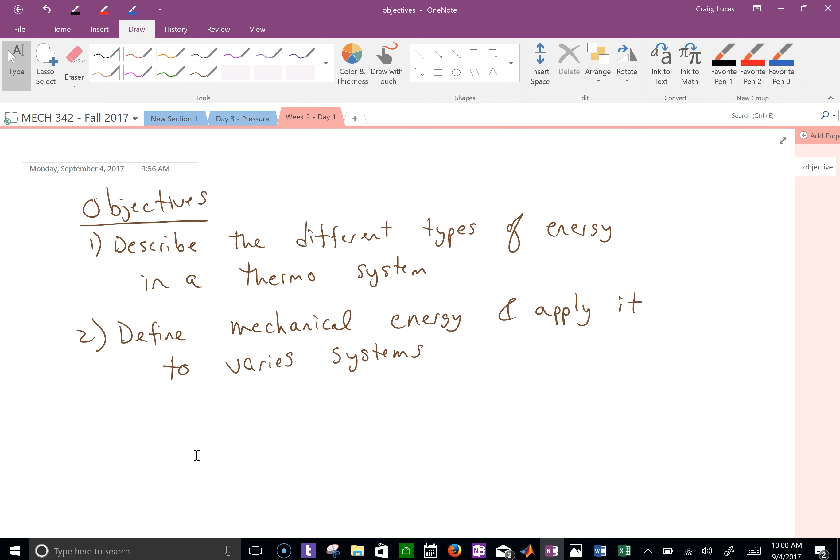Okay, so the plan of attack today is I'll do a quick review of last class, and then hopefully answer the question about pressure. And then we'll describe the different types of energy, and then define mechanical energy.

Power. Are we doing that today? No, we're not doing that today. We will. Yeah. For the objectives?

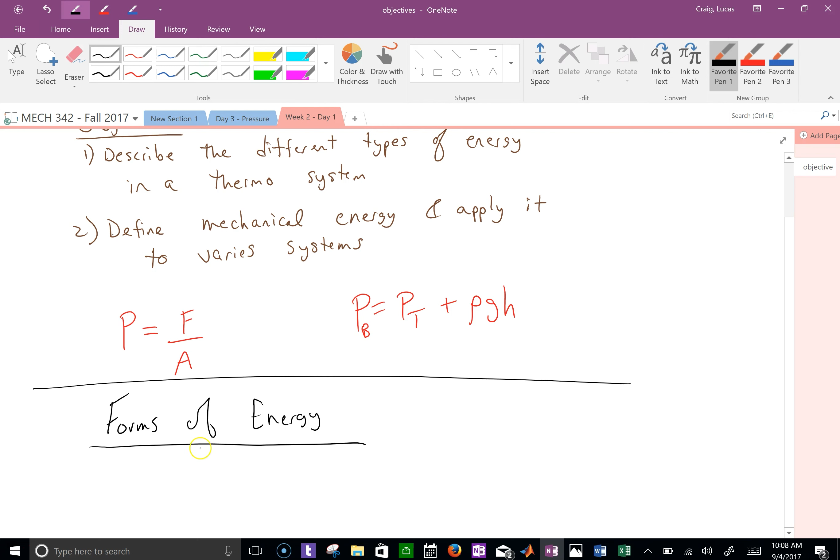Yep. Okay, so forms of energy. You already know them, but it's good to review. Kinetic energy. So what's the kinetic energy equation? Did you get those, Ben? Yep. Okay. Yeah, 1/2 mv squared. And m is your mass, and v is your velocity.

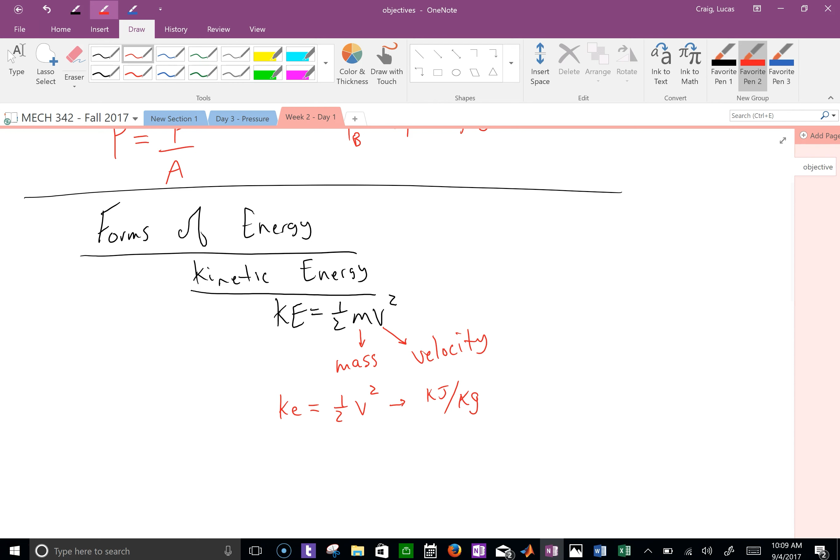Now, you will see this a lot. Little ke, what do you think that is? Specific kinetic energy. And actually, this equation is 1/2 v squared. Because what's the unit now? Could be joules or kilojoules per kilogram. Yep. You will see that.

Okay, potential. I think we're going to cover, my guess, when is it going to be? Friday will be the first law. Basic fundamentals of the first law.

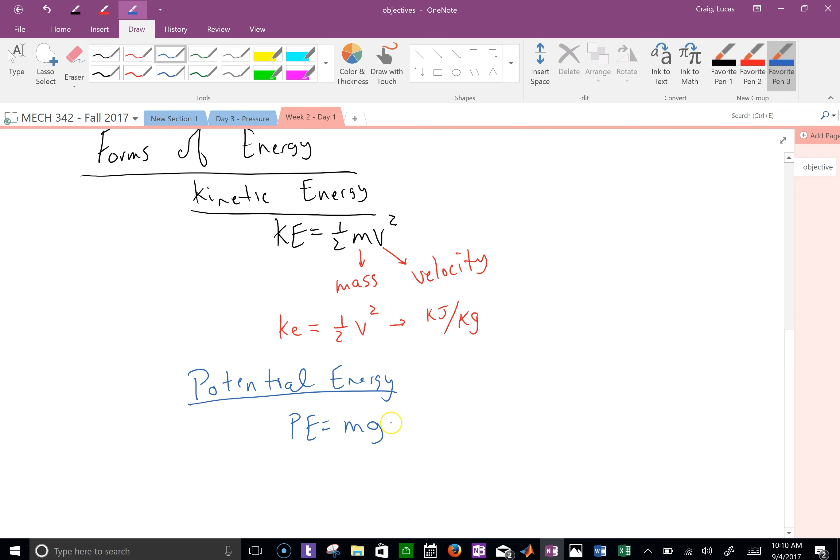So potential energy, remember that equation? mgh or z, doesn't matter, yep. This is your mass, g is your acceleration due to gravity, and this is elevation. Anytime you do potential energy, you should have a datum. Right? What is a datum? The reference point. If you're above your datum, your potential energy is positive. If you're below your datum, potential energy is negative.

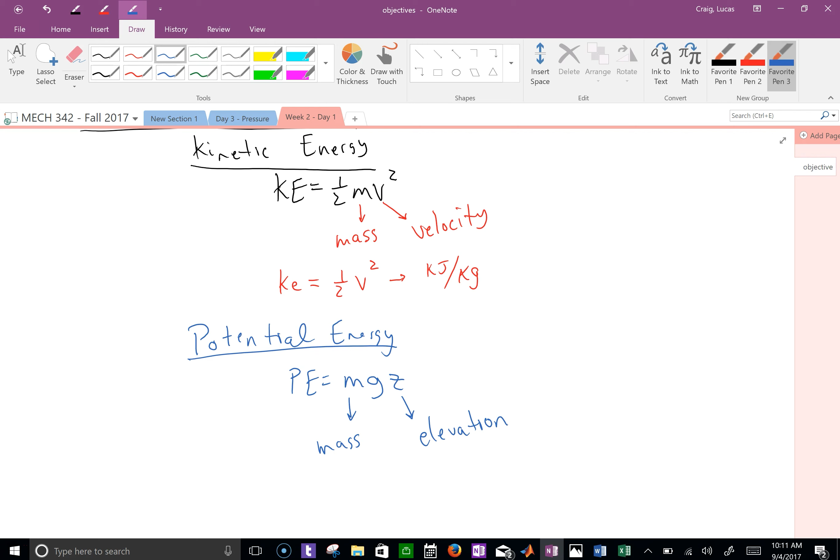What's that? It is just dependent on if the system is doing the work. We'll talk about that next week. Okay, you'll see negative and positive and what the difference is, because there's equations that I want to show you that do that. Okay. What about little pe? What's that? Yep. So it'd be just gz.

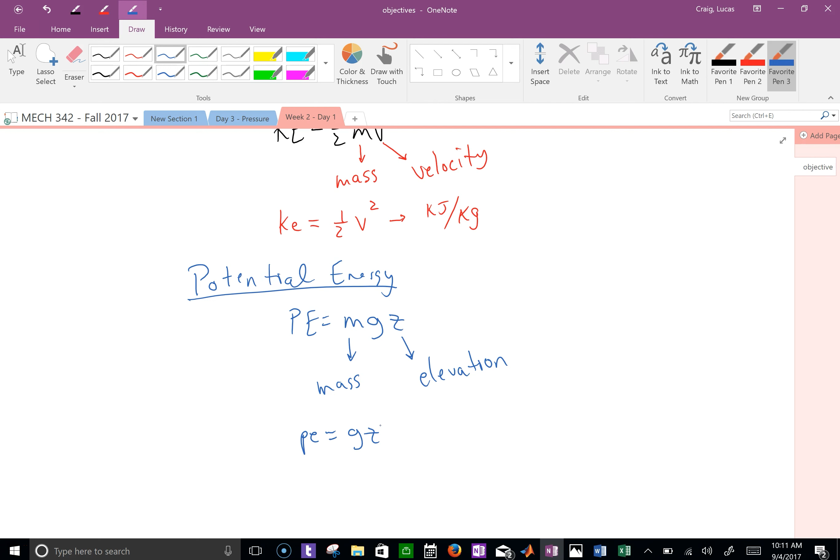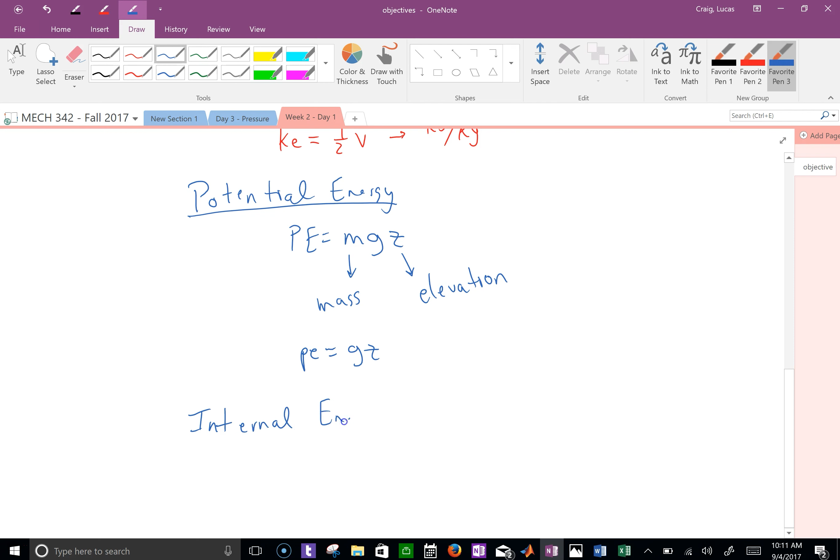Okay, the last one, actually there is one more, but we won't cover that till probably Wednesday. Oh no, we will cover that. Okay. We have internal energy. Yep. Internal energy. There's no real equation for this until we get later on in the semester, but you'll see internal energy as big U or little u.

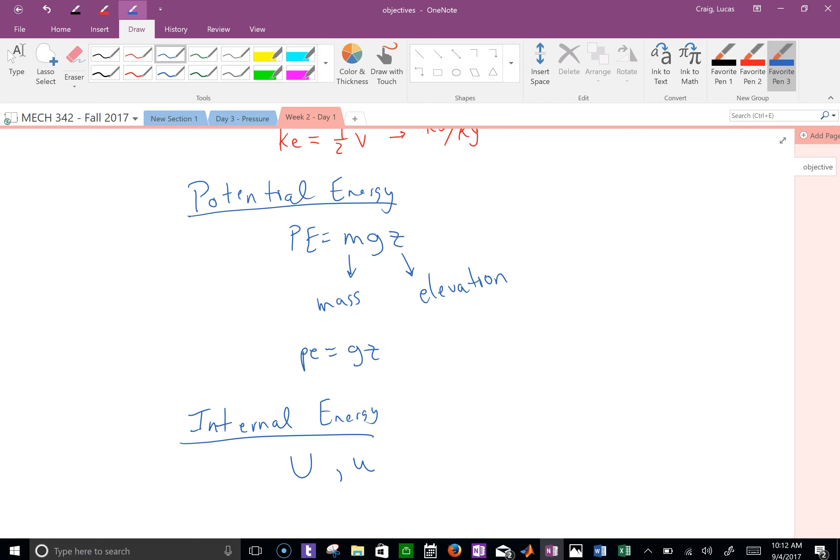And all internal energy is, it's just dependent on temperature. So if the fluid or the gas or whatever's at a certain temperature, it has a certain internal energy. Okay, and you can kind of think about it as how fast the molecules are moving. It has so much energy. Okay. Total energy, you just add them up.

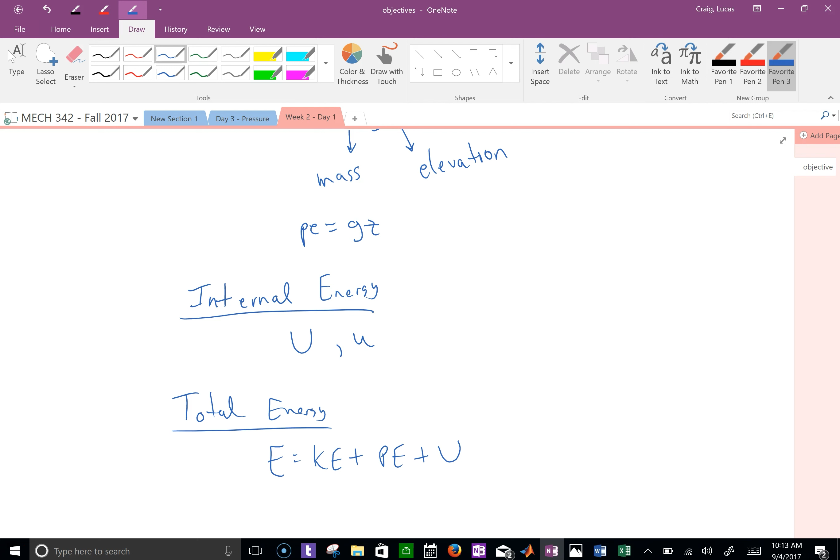And there's other energies like magnetic, electrical, and chemical, but we're not going to include those right now. You may also see the change in energy. So that's just the change of kinetic, potential and internal from two different points. Questions so far?

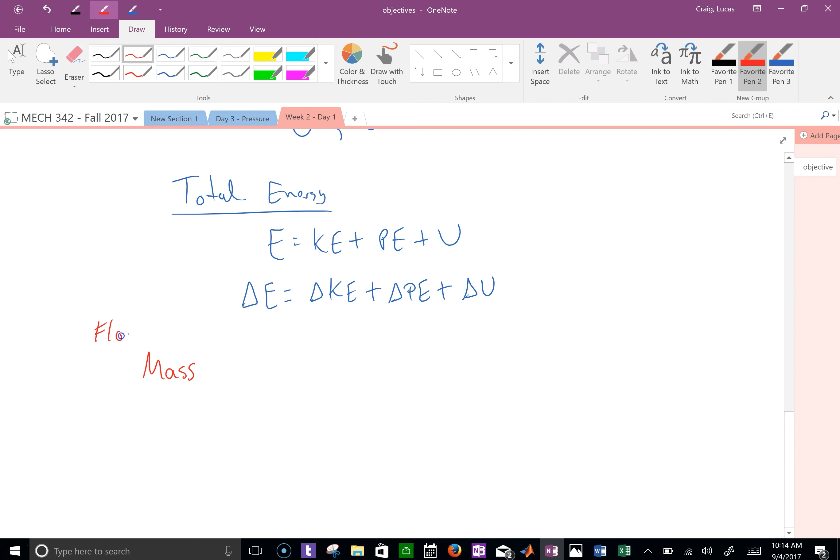All right, some other information that we need to remember or define if you haven't taken this. So let's look at flow definitions. So mass flow rate. What's the basic definition of mass flow rate? It's m dot, meaning it's kilograms per second. So in differential form, that's the change in mass over the change in time.

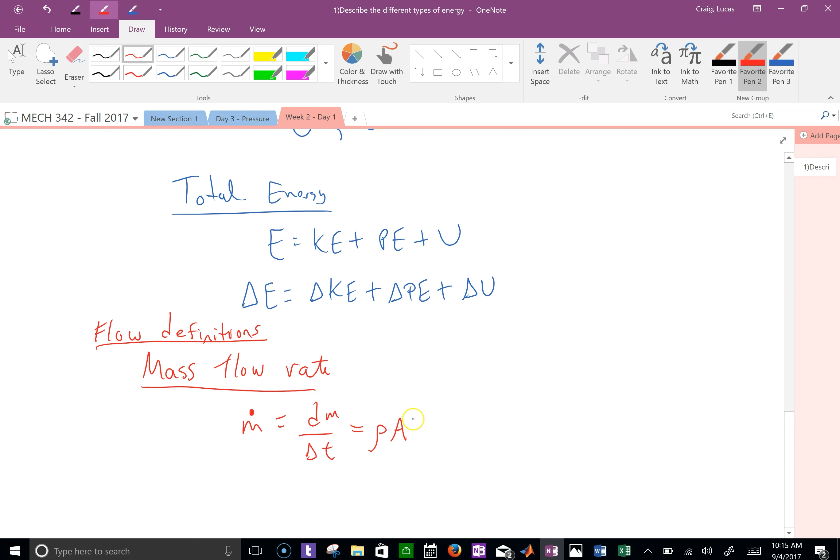Anybody remember the other equation we can use if we know the velocity and the area? Rho A V. Yep. So the density of the fluid times the cross-sectional area times the velocity will give you mass flow rate. Why? Well, check the units. Kilograms per meter cubed times meters squared times meters per second. What does that give you? Holy smokes. Kilograms per second. That's cool, huh? So rho is the fluid density, A is your cross-sectional area, and V is your velocity.

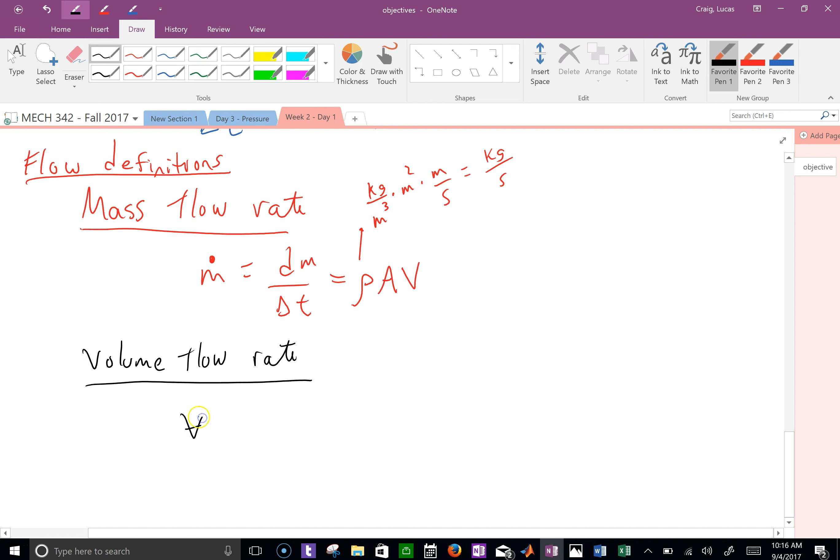How about volume flow rate? Oh, didn't mean to do that. Volume flow rate is your cross-sectional area times your velocity. So how can we rewrite m dot? Yep. Rho times volume flow rate. So just as a side note, sometimes it's written like that.

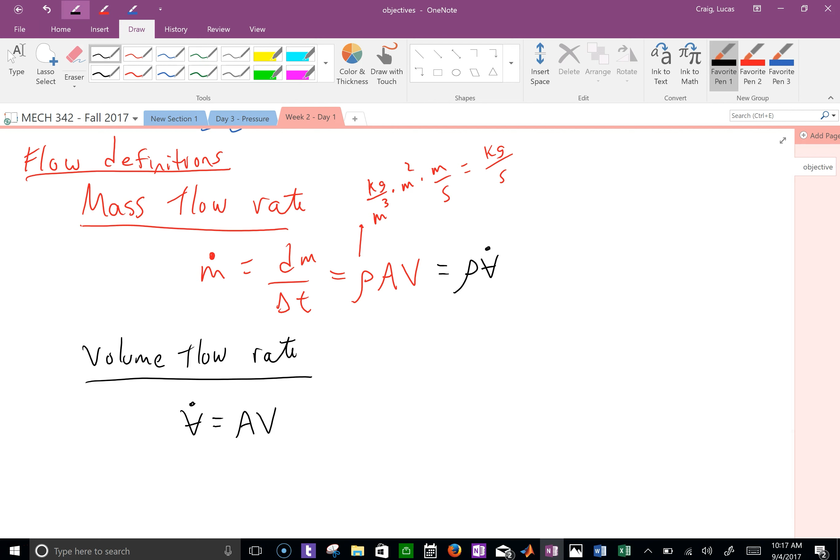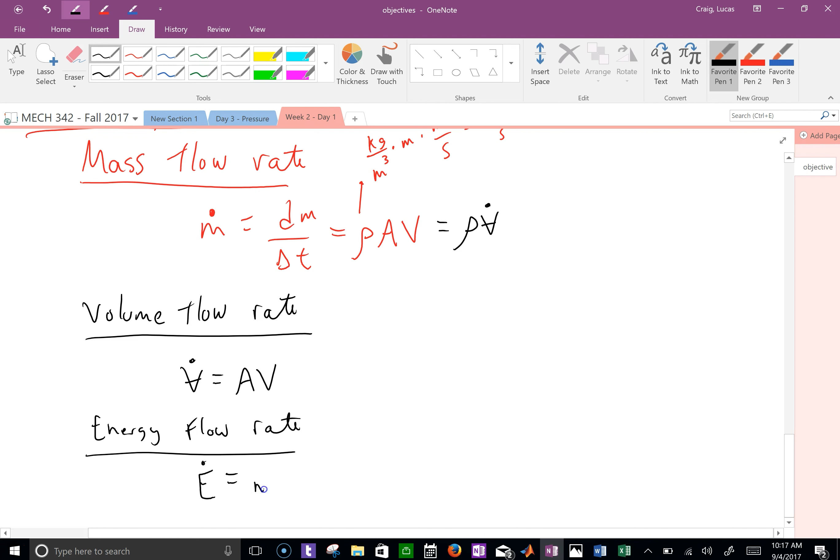You could also have energy flow rate. Anybody want to guess what that symbol is? E dot, and then it's m dot times little e. What's the unit of little e? It's just specific energy, right? Kilojoules per kilogram. Because what's the unit of m dot? Kilograms per second. So you have a joule per second. Okay, so let's talk about mechanical energy.

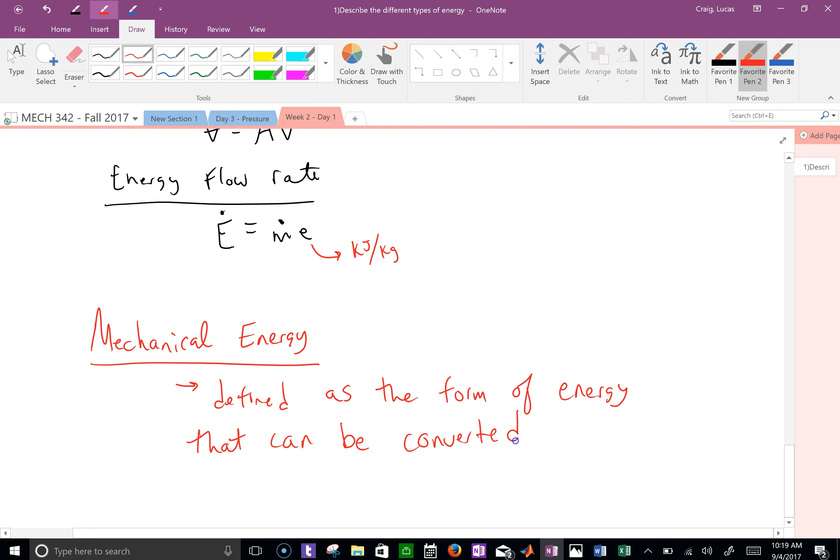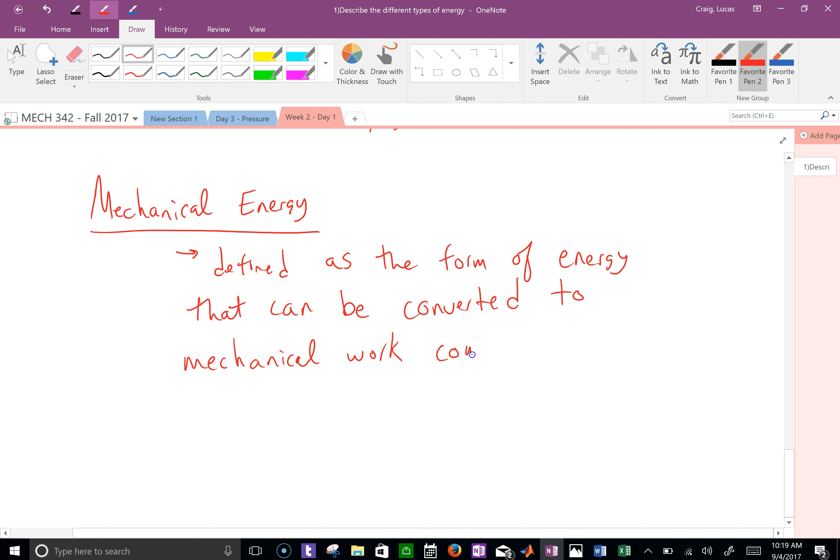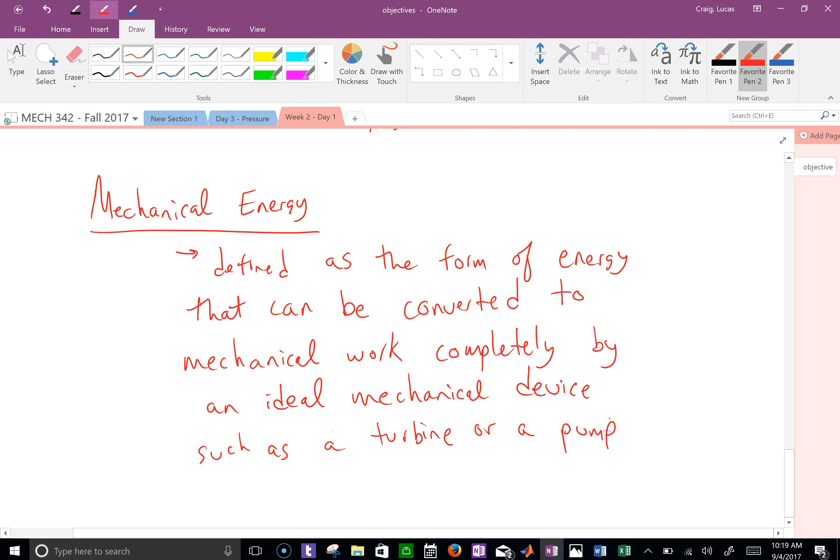So mechanical energy over here, defined as the form of energy that can be converted to mechanical work completely by an ideal mechanical device. So this is really, make sure you put this up here, it's a fluid energy.

The students that have taken fluids, think of Bernoulli's, all right? I know, but, wait, what did I say? Oh, so taking fluids, thank you, okay. I had that completely different in my head, apparently. Bernoulli's equation is really this, okay? So mechanical energy is really energy of the fluid, okay?

So if you take your gas pump, go to the gas station and you fill up. When you hit the button, it takes the energy from that tank and moves that fluid to your gas tank. Okay, so you're looking at basically a liquid or a gas. Most of the time, it's easier to look at a liquid, like water, like a pump. So we're going to look at the energy of that liquid or of that gas. So it's basically saying that there's no heat transfer in mechanical energy. We neglect heat. We just look at the mechanical part.

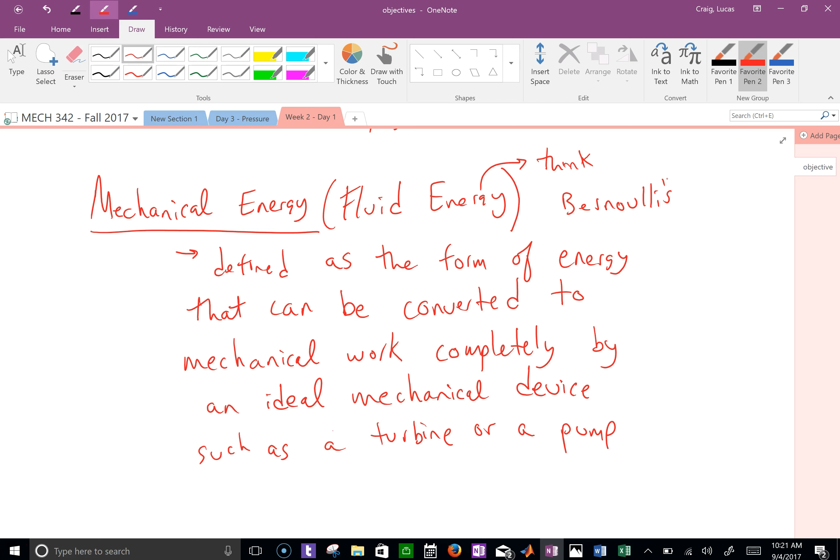Okay, so we're going to do an example, and I'm going to show you a little bit more on this. Most of the time we look at turbines or pumps for this. Yep, that's a turbine. All right, so one thing before I show you this setup here is for fluid energy, we have to include what they call flow work.

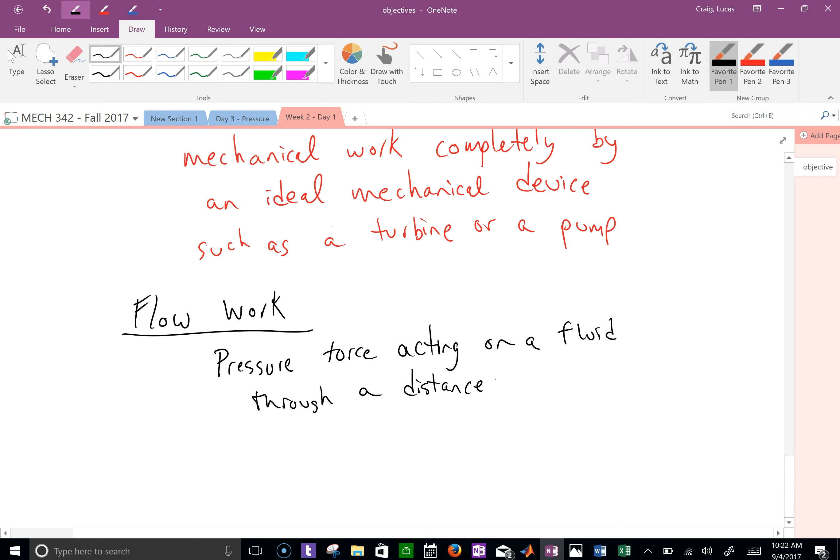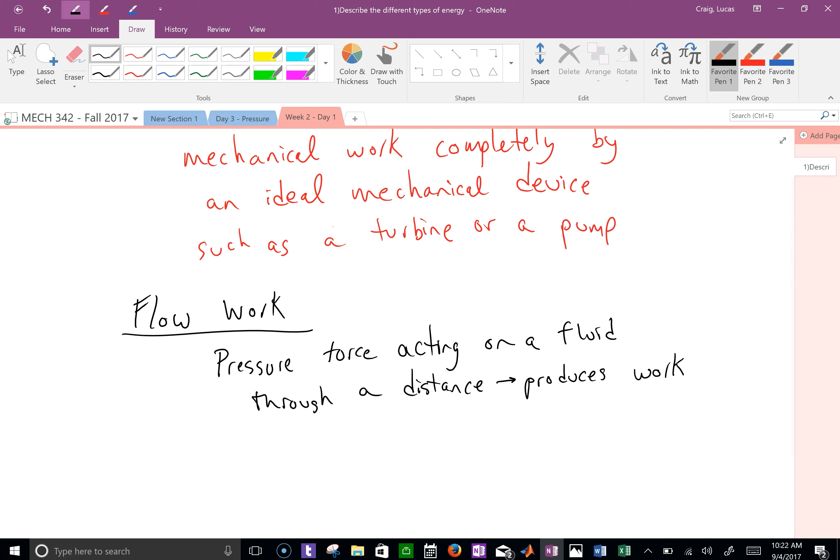And there's no symbol used for it. They just call it flow work. Yes, right here. Yep, and that's specific volume. Yep.

So again, mechanical energy is only looking at the energy of the fluid. So that's the biggest thing to remember. So let's take an air compressor. We pump it up. It's got a high pressure inside, right? And it's sealed. That has energy. That's what this is. It has like some sort of pressure energy. When we open the valve, all that pressure is basically being applied and pushing that out. Okay? So that's converted to kinetic. Does that make sense? That pressure energy is then converted to kinetic.

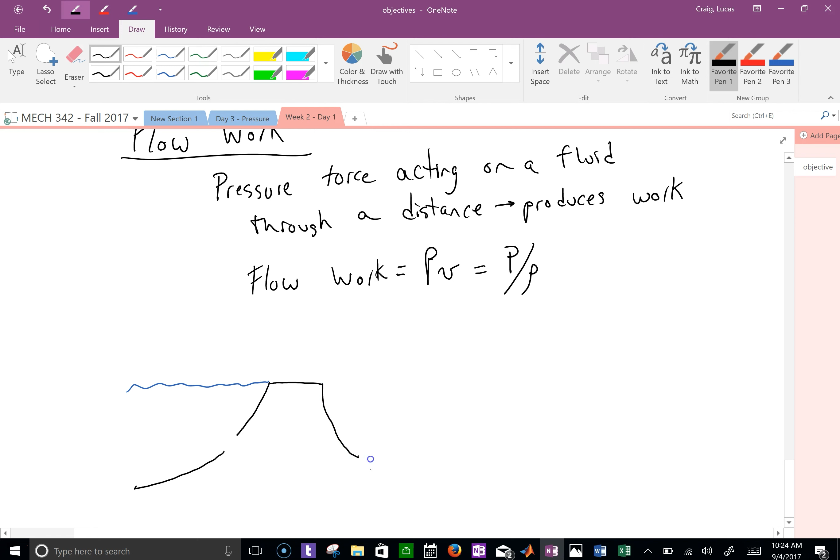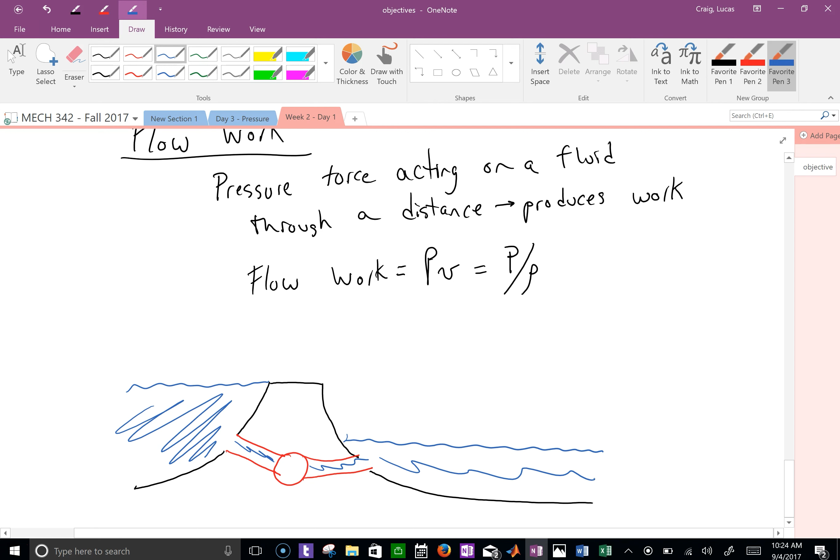Now, in the example I'm going to show you, if we have water like a dam and it falls down, you have pressure and you have all this other stuff, okay? So let's look at this, and I think this is very similar to the practice problem I'll do. That's P over rho. P over rho, yep. So here is, let's look at this. It's like a dam, and there's like a turbine right here, and the water's flowing through it.

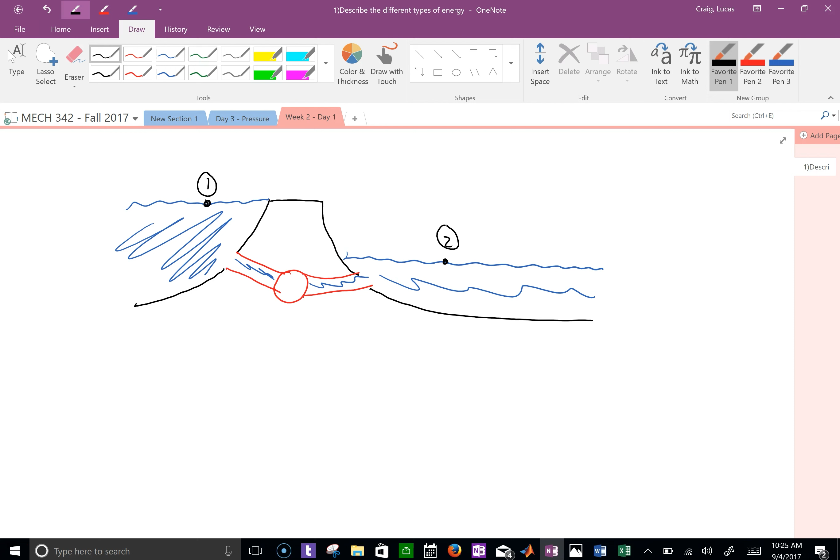So we're going to pick 2 points. Liquid, water, has energy, right? So it has this mechanical energy. We're going to neglect heat, so it's mechanical energy. And I picked two states, one on the top left and one on the top right. Could I pick my point 2? Could I pick point 2 like right here or right here?

I mean, you can. It's fine. Sure. Right? Because we're looking at energy. It doesn't matter. Energy is conserved no matter where you are, okay? In a direction of flow. At state 1 and 2, what can we assume about the level of the water and the velocity? In this case, if it was stagnant and it's just pretty high, these velocities could be 0. Right? But if we pick point 2 here, does that have a velocity? Yeah. Okay, that's fine. Doesn't matter.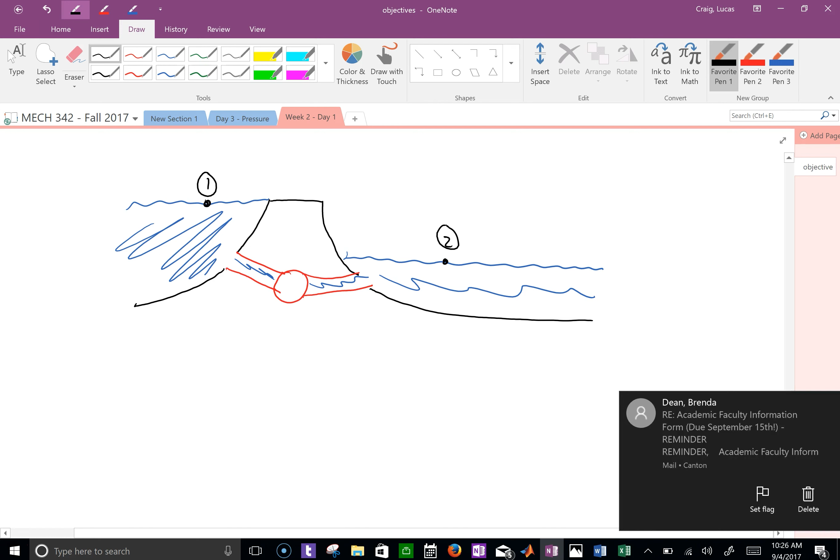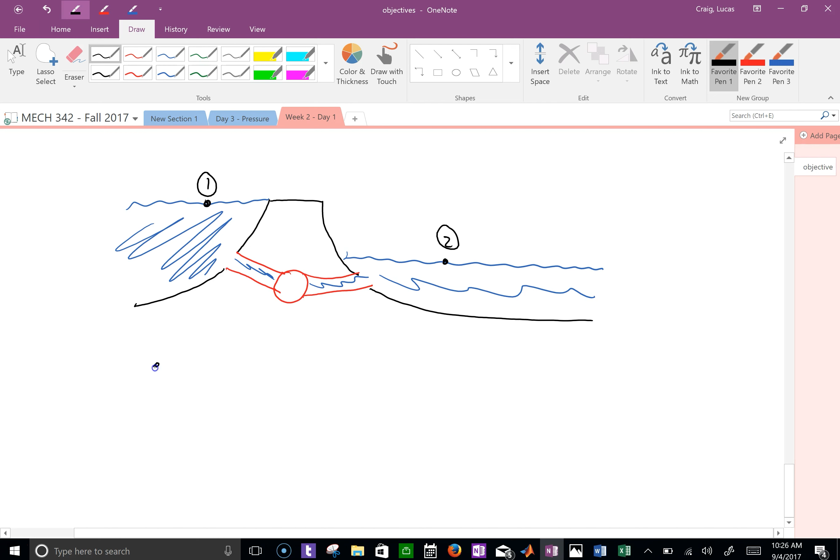Okay, what about the pressures? What is the surface touching? Atmospheric. So they're both atmospheric, right? Yep. But what's the main difference? Elevation. So it has potential. But let's write the general form for all this, which will help you in the homework in this next practice problem. At state 1, it could have kinetic, potential, and flow work.

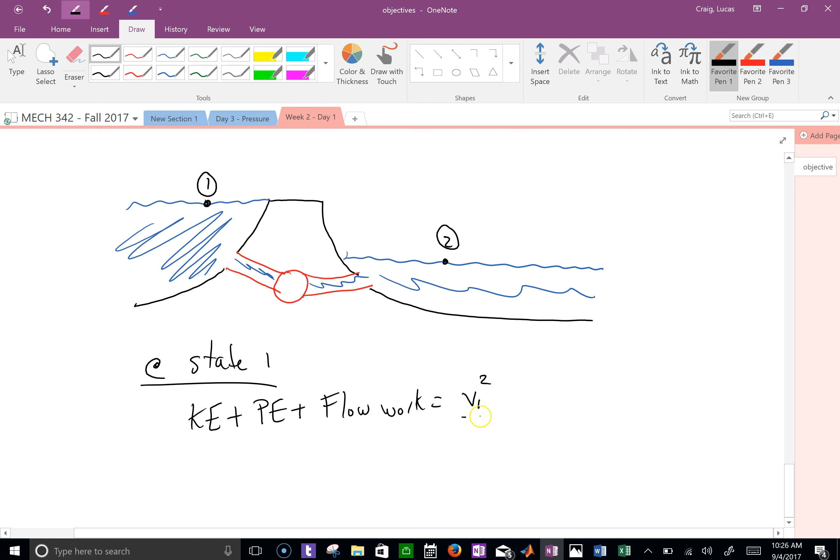So let's put them in units of per kilogram. So V1 squared over 2, plus gZ1 plus P1 over rho. At state 2, it could have kinetic, could have potential, it could have flow work. V2 squared over 2 plus gZ2 plus P2 over rho.

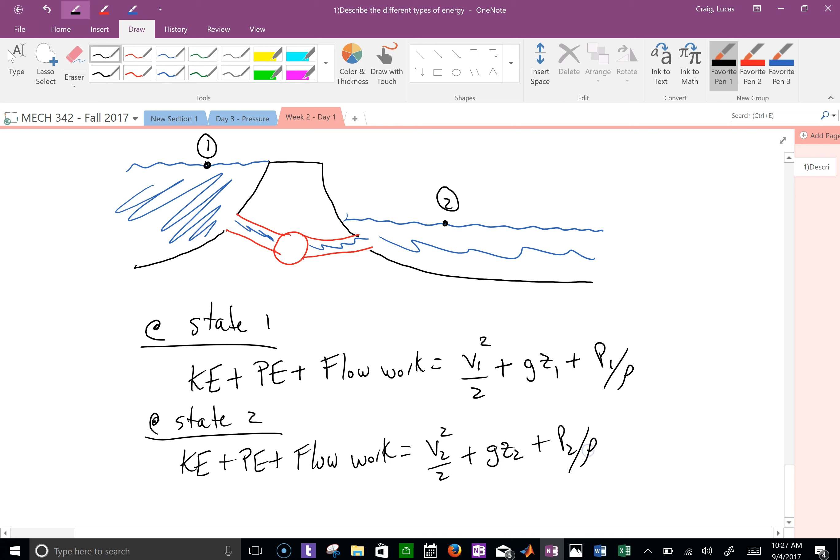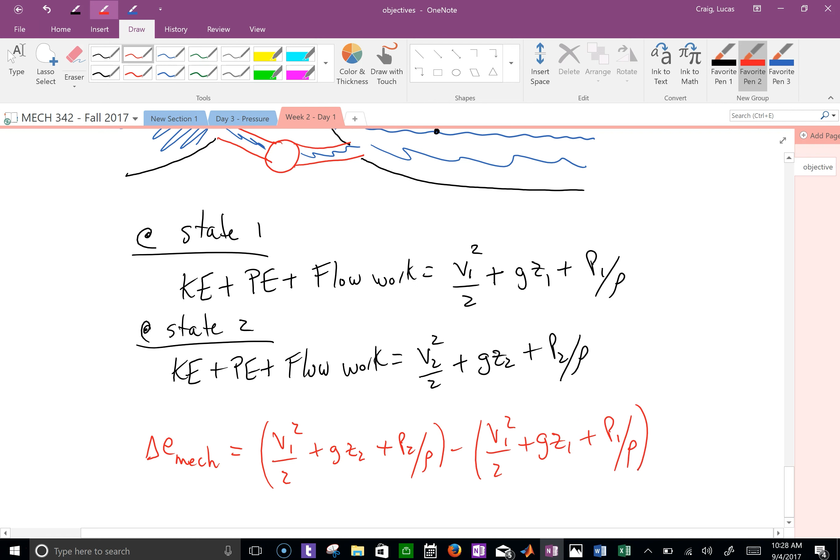Now we're looking at the change in mechanical energy, so what do we do to find that? Just take state 2 and subtract state 1. So let me write this fully out. And the reason I'm doing this is because this is what I want you to start doing on your homework. Write the whole equations out that you have, and then cancel everything.

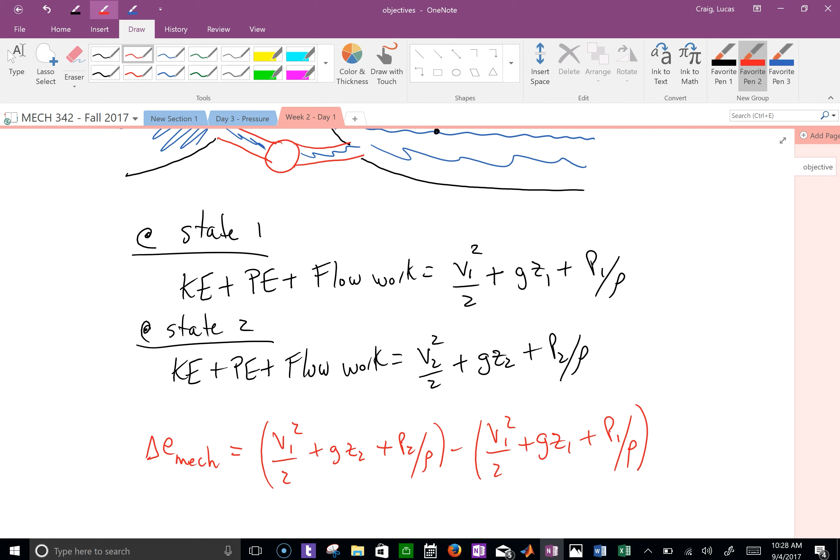Yes. Oh, did I switch that? I'm sorry. This should be V2 at the beginning here. Yep. Is that what you meant? Yes. Sorry. Thank you. Is that what you were talking about, Ben? Yep. Sorry, I didn't catch that.

So in order to find the power, which is the change in mechanical energy per unit of time, which we also define as W dot, it's just your mass flow rate times your change in mechanical energy. So basically here we had a dam, and we picked 2 points. There's no velocity at either point. The pressures are the same, so you just have gravitational. So if we know the mass flow rate going through that turbine, then the maximum power we could possibly get is the change in potential times your mass flow rate.

That's what this practice problem I'm going to do is. I had it printed out and I forgot to grab it, but that's fine. I'll let you write it down. It's not too long. Questions so far? Make sense? So it's really Bernoulli's, it's just fluid energy. So let's do this practice problem.

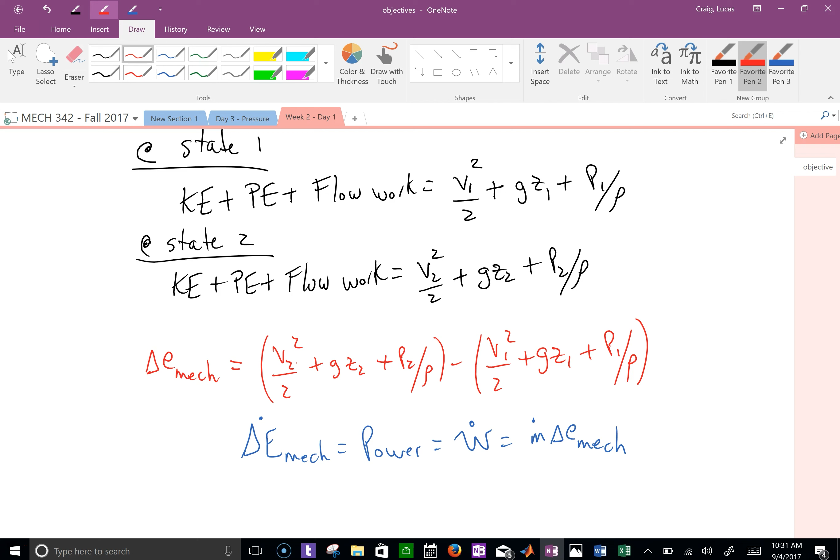A river flowing steadily at a rate of 175 meters cubed per second is considered for hydroelectric power generation. It is determined that a dam can be built to collect water and release it from an elevation difference of 80 meters to generate power. Determine how much power can be generated from this river water after the dam is filled. While you're doing that, I'll just set up the problem.

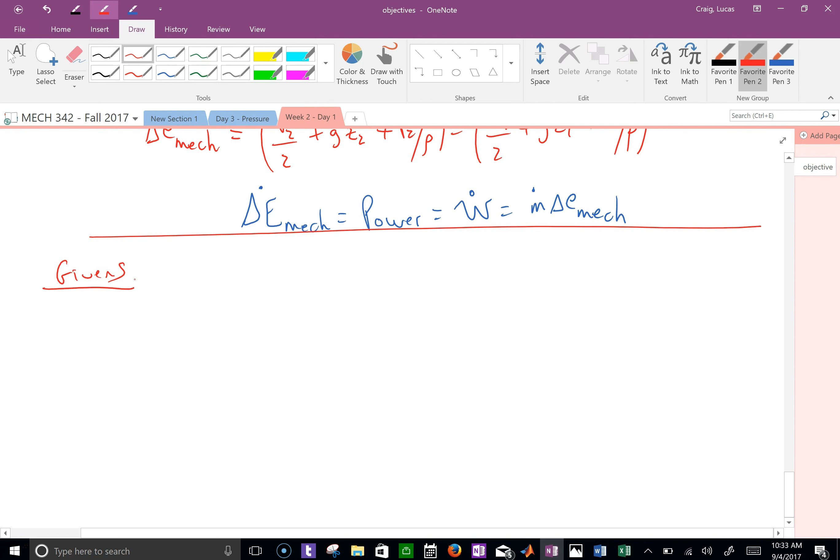What's the density of water? 1, what's the unit? 1 gram per cc, or it's 1,000 kilograms per meter cubed. So remember that. So these are generic, general questions. We'll be more specific, but basically it's looking for the maximum power that can actually be generated if it fell, was it 80 meters?

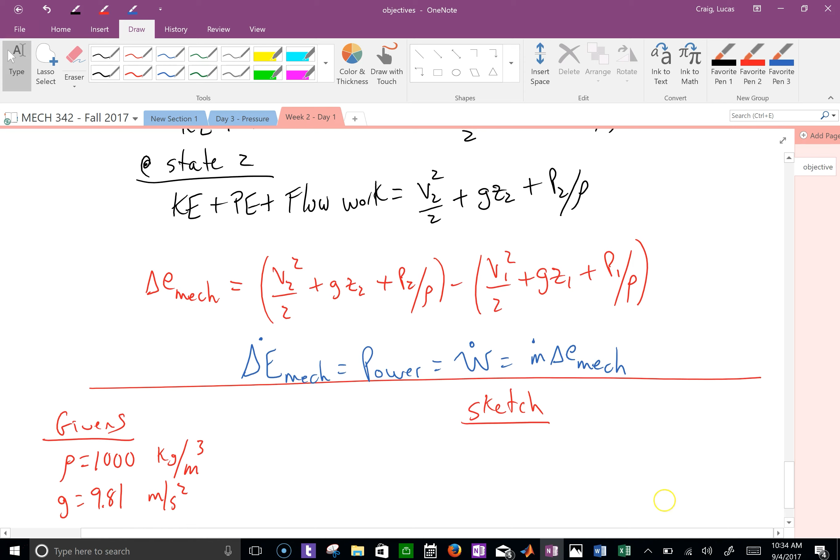So the sketch is very similar to what we had. So I'll just kind of draw it real quick. I know you can't see it yet.

Okay, let's see how this, everyone have this? Can I go back to the, so you would start doing this in the problem, right? Your givens through your sketch, okay? So go ahead and write that down, then I'm gonna just tweak a few things.

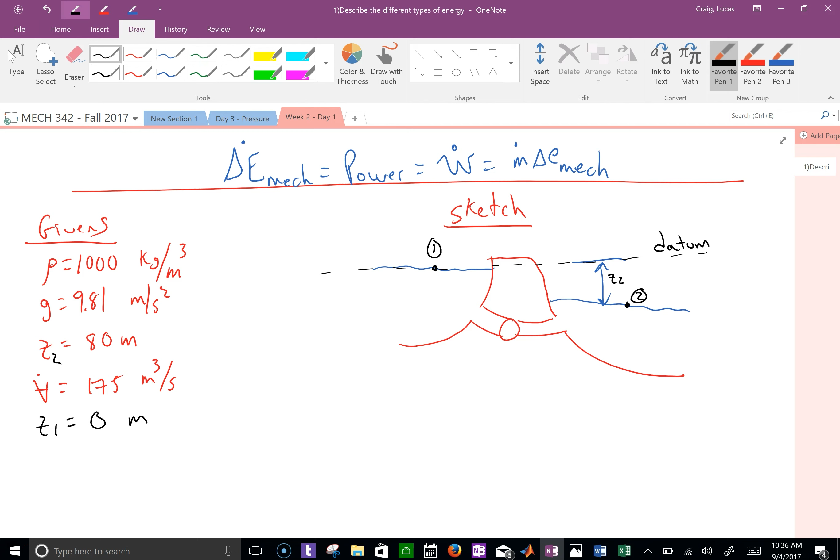And let's pick our points here and here. And I'm going to try it. Hopefully it works. So what I tweaked was I labeled Z2 down. So this distance you can call Z2, 80 meters, where my datum was at 1. And we're trying to find the power.

So as you're finishing writing this, what do you think the assumptions are that we could use? Yeah. Yes, you could do that in the givens, sure. Yep. I was going to talk about that when we get to the solution, but that's fine. Yep, because it's down, it's below the datum. So before we do the assumptions, let's talk about that.

So what happens to that energy as it falls through? It converts to kinetic, but our point 2 is over to the side, so we're not assuming velocity. But when you drop something, the potential energy decreases, right? Which becomes negative. Where if I raise this block up in altitude, it's above a datum, that means I'm gaining energy, okay? So that's the difference between a positive and negative.

So let's go back to the assumptions. First assumption would be that water is incompressible. That's always the case right now. And the other one is we're neglecting any heat between these systems, any heat that's being generated to raise the temperature or anything. So that's why it's like a mechanical energy. We're only looking at that part.

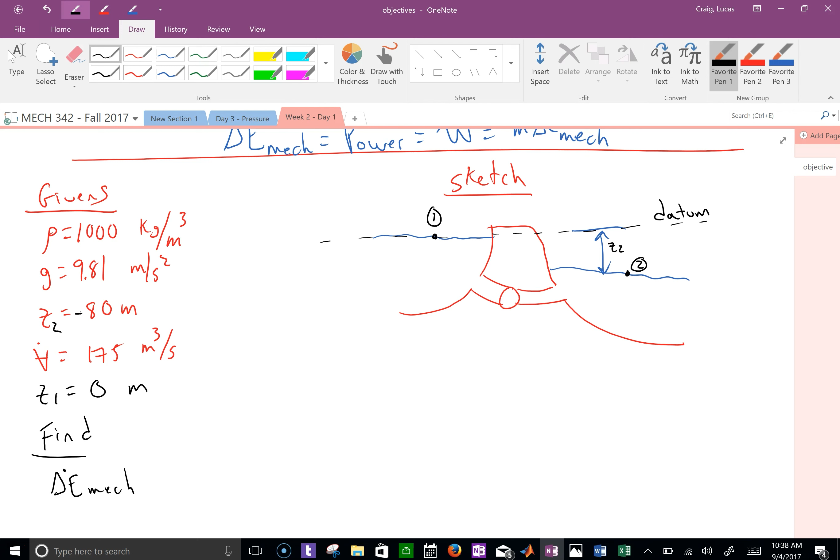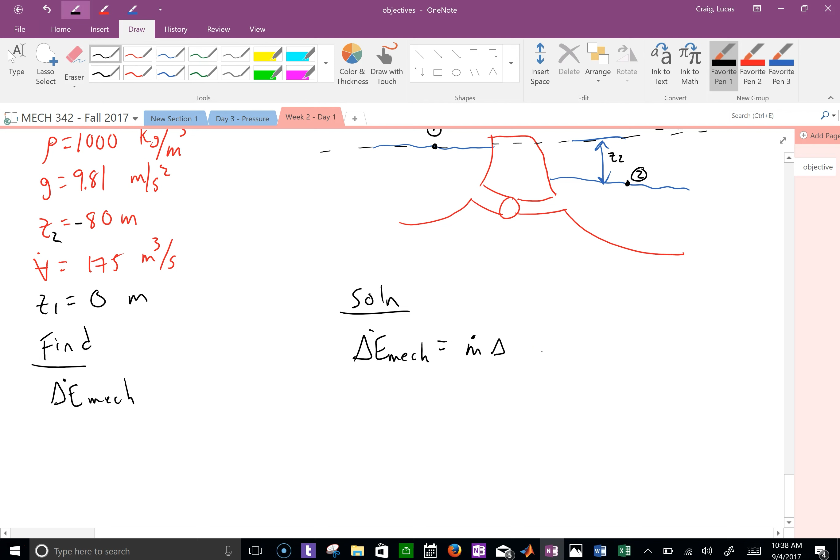Okay, so let's get to the solution. I'll do it right here, just to save some space. So we know that the change in mechanical is m dot times little change in mechanical, right? Is that what we had? I hope so. Yes. So I should have a heading. So find power.

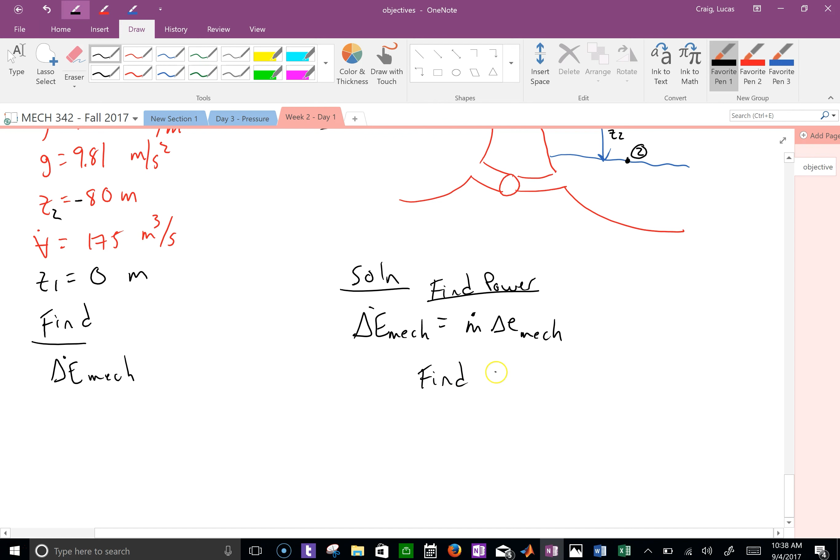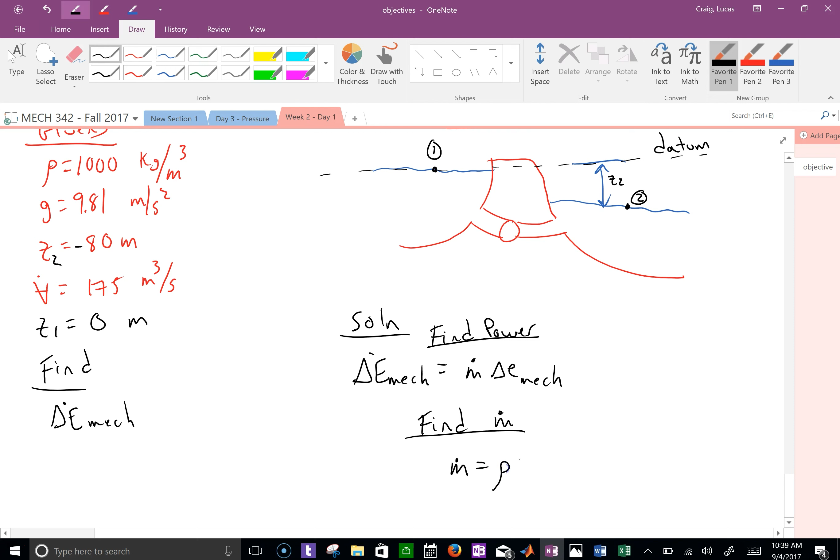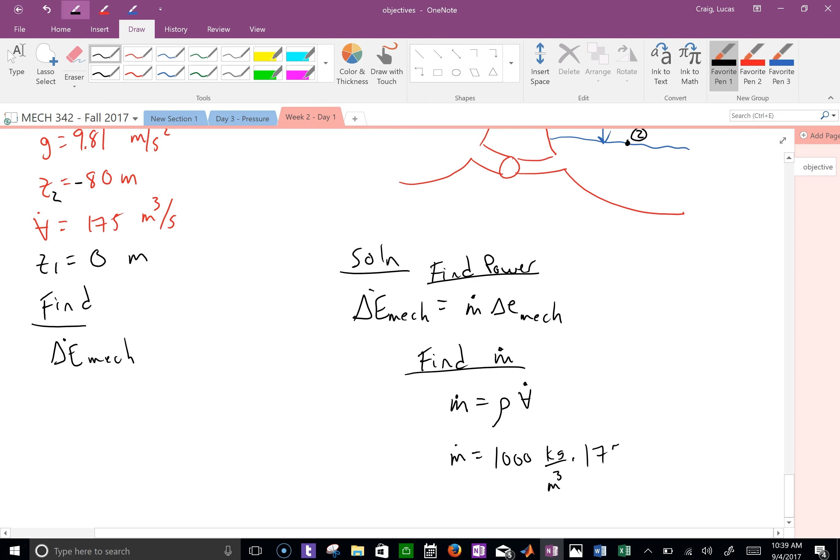So let's find the mass flow rate. What's given in the problem? Density and volumetric flow rate, right? So how do we find mass flow rate? Yep. So m dot equals 1,000 kilograms per meter cubed times 175 meters cubed per second. This is 175,000 kilograms per second.

All right, let's find change in mechanical. And we have that. So let's write that fully out. That was V2 squared over 2 plus GZ2. And then just make sure I have it right. This is the pressure. Let me fix that.

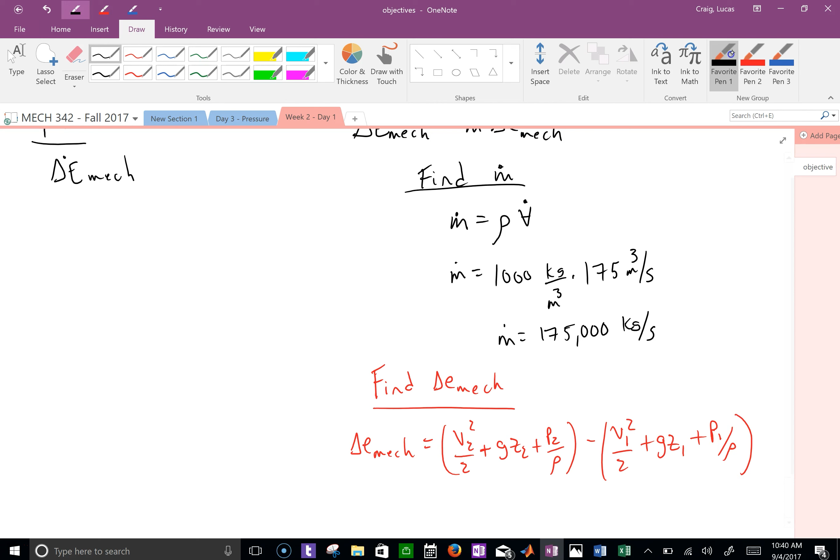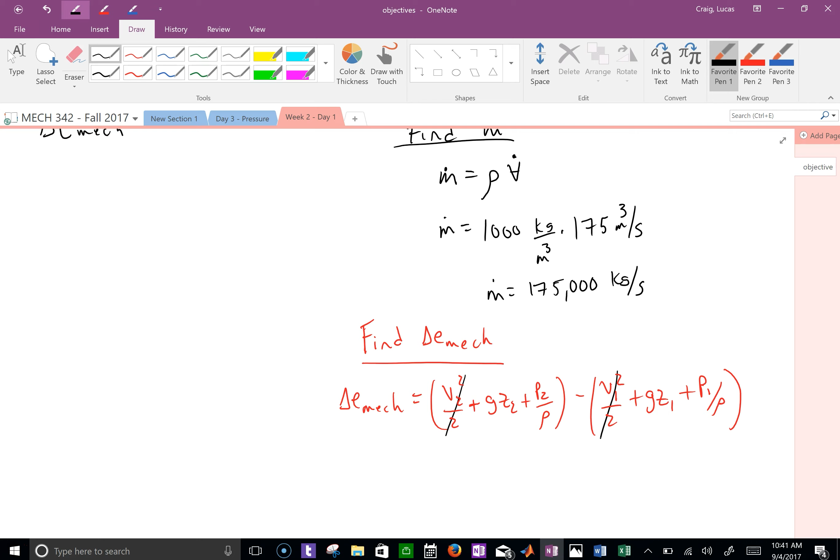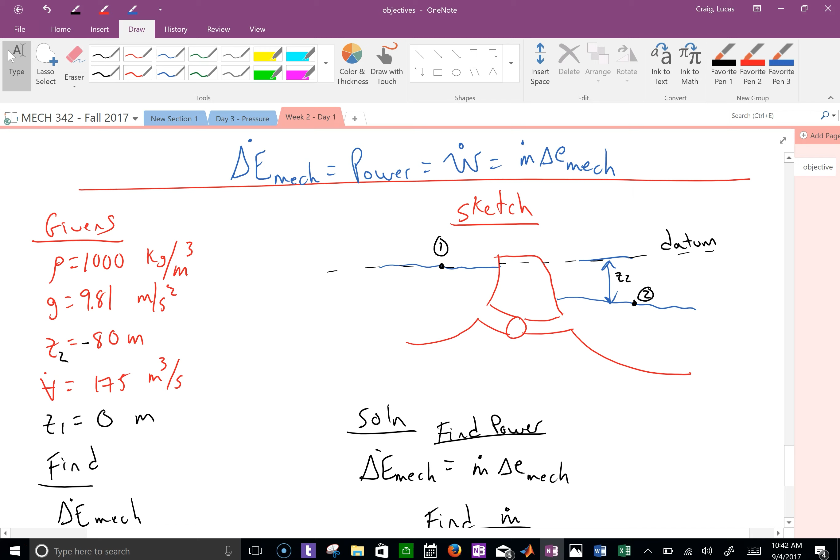So if we pick point 1 and 2 way away from where the velocities are changing, the velocities are neglected. And what is the pressures at those two surfaces? The same, yes, because we picked the points so they're far away. They're like the top of the surfaces, so we're going to assume the velocities are really close to 0. So this is trying to find a maximum case, okay? The pressures are the same, they're atmospheric.

So now we have what? Yep, and Z1 was 0. So the change in mechanical is just GZ2. So we can find that. The negative sign just indicates we're losing potential, so don't worry about the signs. The signs are fine because we're trying to find a maximum case. Did I do that? Oh, why did I put G in there? Yeah, that's where our datum is. Yep.

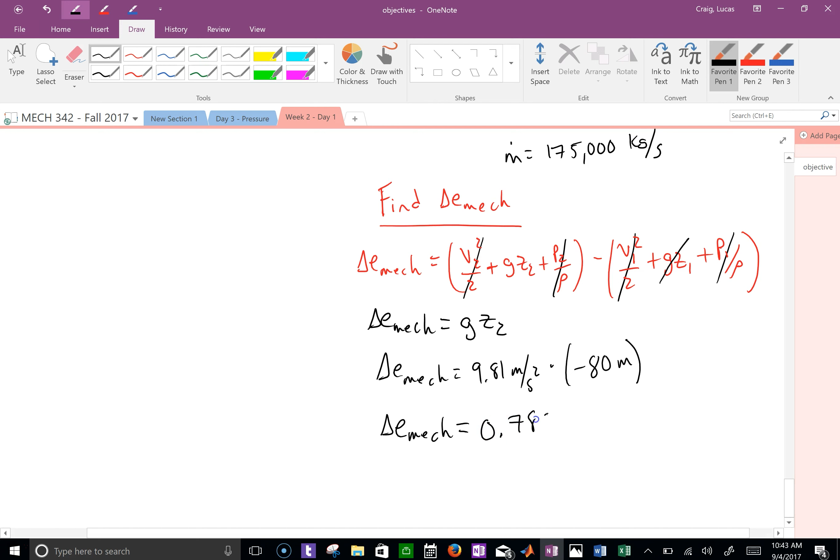I got 0.785 kilojoules per kilogram. Negative. That's fine. The negative doesn't really matter because we're looking at two different states. So don't worry too much about the negative because we'll find out this is just a maximum case.

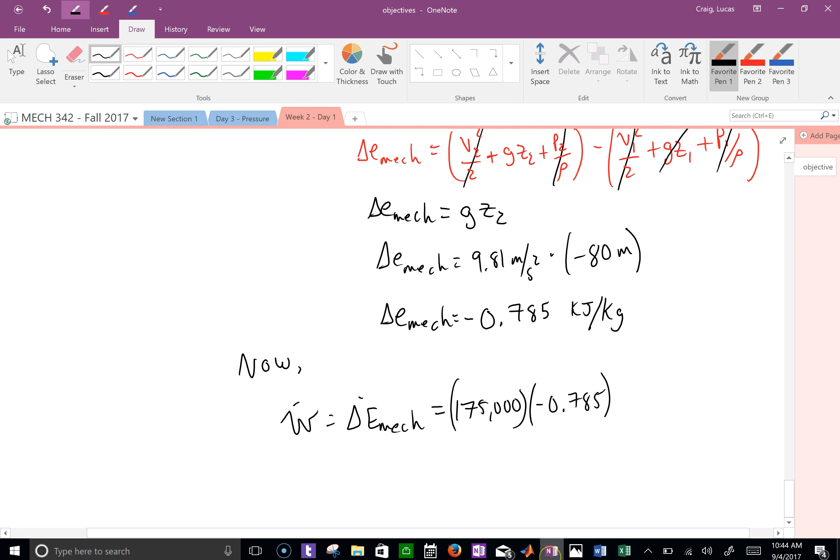And now, what do we have? The power is 175,000 times negative 0.785. We get 137 megawatts. We could put the negative in here, that's fine. But it's just, again, based on our location of datum.

We could have picked datum at 2, right? If we did that, then what would Z1 be? It would have been 80, and this would have been positive. So it depends on your datum. It doesn't matter. Just like forces, if you calculate your free body diagram and get a negative force, you just know it's going in that direction. So it's just a direction, so don't worry.

So this actually is the maximum possible case you can get with this water flowing through here, changing 80 meters down, okay? That's the maximum energy you can get. It's definitely going to be lower than this, right? For sure. But this is a good guess. Questions?

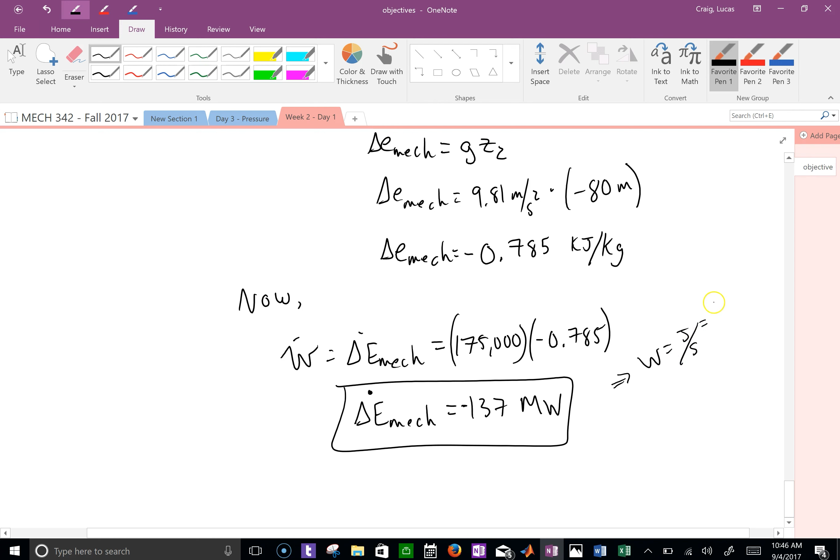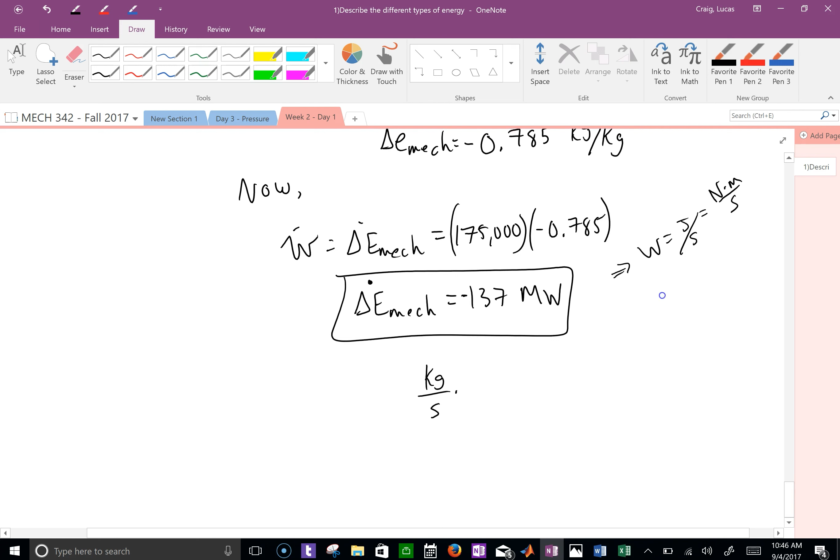What is a joule per second? You remember what a joule is? It's a Newton meter; over a second, that's what the watt is. So inside there is the kilograms inside the Newton. Okay? I didn't actually put the units in, but let's do the units. What was the units of 175? So kilograms per second times joule per kilogram. So you get a joule per second, which is really a watt.